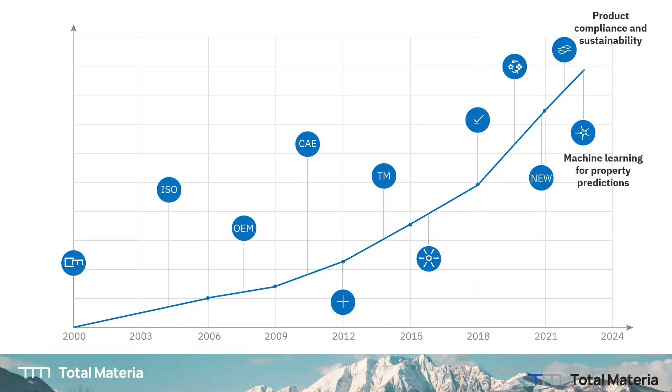In early 2000, we started serving the engineering community. We have 30 subject experts, support specialists, IT and software engineers continuously updating and upgrading Total Materia content. A lot of new products, a lot of new solutions for you to solve your challenges. Headquarters in Zurich, Switzerland, and our development office in Belgrade, Serbia, so close to Romania, in Eastern Europe. From Belgrade we are reaching more than 100 countries.

And as you just saw, so many industry leaders and companies have been using Total Materia for a long time. Our team is at the heart of the company; our dedicated team is the driving force behind delivering knowledge, and they're all hard workers. I'm glad that I'm working with this genius team here.

Our areas of competence: reliable digitized data. Reliability is very important because you can reach so much information through the internet, but you're not sure if it's reliable, if it's okay to use, if it is correct and accurate material information. The more accurate information you reach, the better your estimations, your simulation results, and your products get.

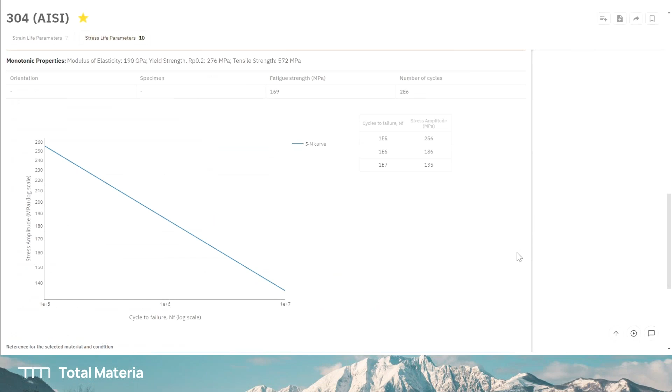When you type a material, it will give you suggestions with a lot of different standards. We have thousands of mechanical properties of one and only material. It depends on the form of the material, the thickness of the material, the heat treatments of the material. You can see the joints information, you can see strain curves, SN curves. Within one click, you can export this material card into your solver.

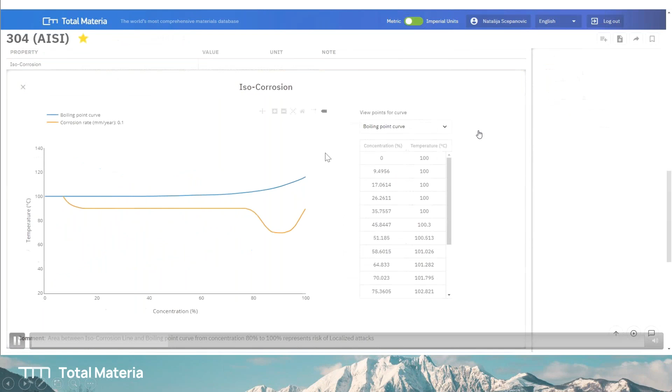You see thousands, tens of thousands of corrosion tests here for this specific individual material. You see the detailed view. It gives you elevated temperature, different mechanical properties and physical properties, of course, according to different standards, different heat treatment, different form of the material, different dimensions, and it's all detailed information in one particular material. We are talking about thousands of mechanical properties for the same material,

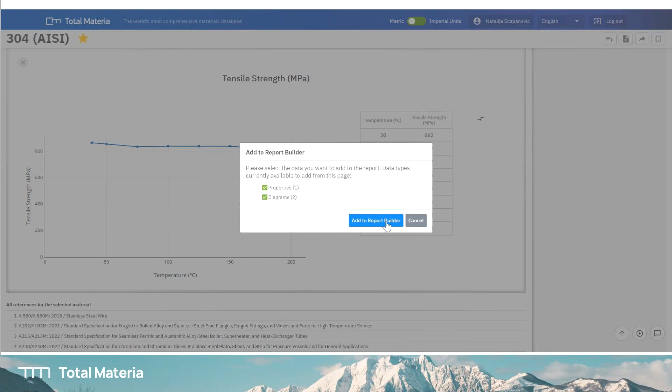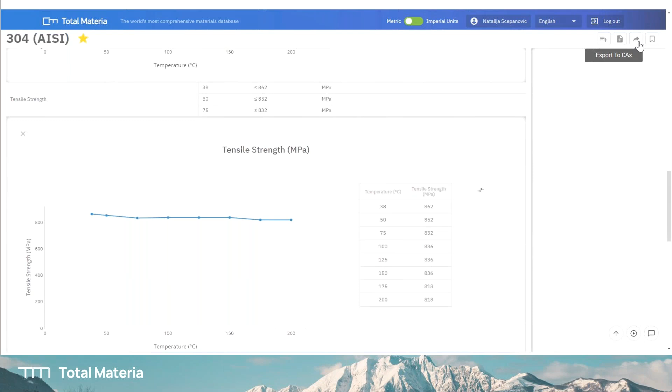because, as you know, let's imagine a sheet metal. At 2 millimeter it gives you different mechanical properties than the 10 millimeter one, right? So it's very easy to understand how rich the material information and content is here, and how you will make more precise decisions. You'll see ANSYS, Abaqus, CATIA, SolidWorks, Siemens NX, anything you want to choose. It talks to your solver, and here we go.

Your material card is ready to go for ANSYS to import, because when you export this data, it's going to go as an ANSYS XML that ANSYS can read. If you export with CATIA, you will see a different format. Then your CATIA can read this material card.

So you see the equivalence of the material. When you filter the same material in American standards and you want to see the Chinese GB standards equivalence, you will have a list of materials. You can click here, I will show you again live, to compare these materials by one click. And you can also save it as a PDF.

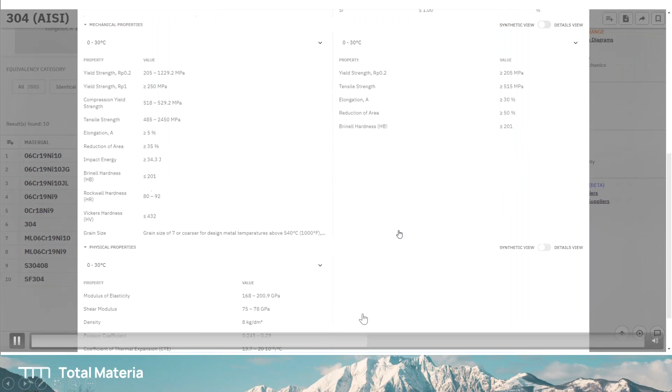You can compare side by side. You can save this comparison and send this PDF to your decision maker to say, okay, you want me to produce this material with the American standard, but I found it in GB standards. It works for me. What about you? Here is the comparison of the material cards, let me know if I can produce this product with this material. So you can get this confirmation real quick, easily, with a reliable source.

Advanced search: when you don't have any material decision already, you will search, filter some material group if you want, or select by mechanical and physical properties, like yield strength minimum value, tensile strength minimum value, impact strength minimum value of the material. So you have something in your mind, you have the project, you have the product, you need some really strong material information. To choose a material by its mechanical or physical resistance, you will use advanced search.

With this click, as you can see, you can compare these materials side by side. You will see which one has the highest tensile strength, which one has the highest yield strength. You can compare up to 100 materials side by side. You can still export or download as a PDF, and you can compare materials in this way.

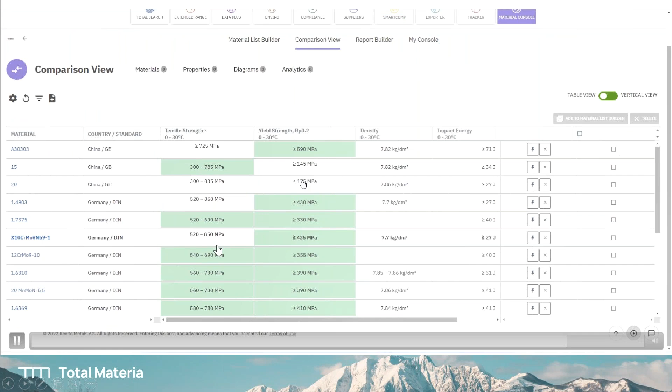And you can compare with an analytics chart and radar chart. 3 or up to 5 different properties you can find. You'll see an analytics with tensile strength and yield strength values. You can check if these materials are compliant according to different regulations, up to 5 different regulations you can put there, and you will be sure that this material is compliant.

Total Materia, I just received a question, sorry about that. Total Materia is updated every single month, for 24 years. Every single month we are adding new materials and also new material information. And greener alternatives, Green Pro certified. This is all information about materials that you would like to ask about in detail. I would love to answer.

Does this material discovery option cover only principal suppliers? The material discovery option covers every single material that we have inside Total Materia. Not only producers' materials, also the national and international standards materials.

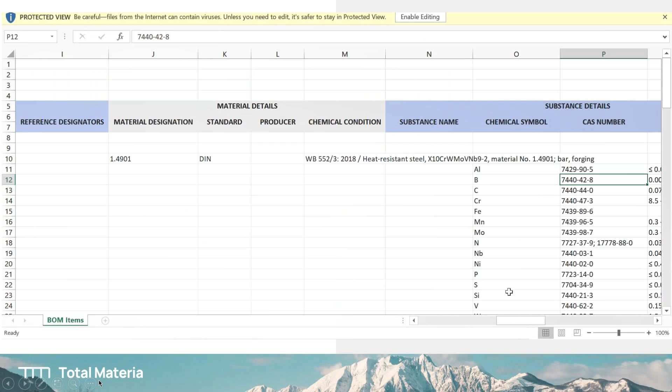You need to know this information. So you are exporting this data. What about the BOM export template? What it says: not compliant because this substance is not listed on RoHS, or substance is not listed. So here's what we find out: 1.4901 is not compliant under California Proposition 65. So what we're gonna do, either we will find an equivalent compliant with all these three regulations, or we will just find another one that is suitable for California Proposition 65. So this is that easy to use actually.

And here we have material list. We are adding new material list like BOM assessment, what materials we are using for our products. So what is our life cycle assessment? It's coming up carbon footprint and detailed information more than this. And you will just choose ecosystem health, climate change, or any other methods. And you can find how it's harming human health or natural resources, like energy demand is very important, critical. You're choosing all these different indicators. So we chose climate change and energy demand and make a calculation.

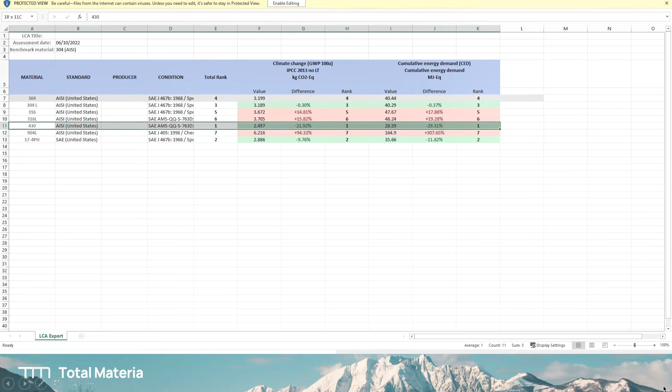We are just spinning up one of these materials. According to these materials, some of the materials that we're using are not that green. You see, we have some greener material here that needs less energy demand or causes less climate change results. So these are the trouble materials that if we change these materials out of our production, we will start producing greener products. We will lower our carbon footprint, right? So all these details, it's very, very easy to use and very, very easy to reach.

And here's our AI tool, Predictor. Predictor will help you a lot. If you're just upgrading or trying to work on new material development, you will have different options to make chemical composition changes to give you a prediction how it affects the mechanical or physical properties, or you have a material, you don't have material information inside the material or anywhere. So with one click, you're testing this material. It will give you temperature dependent predictions. So mechanical property predictions, physical property predictions in different temperature rates. Quick and easy to calculate, easy to use these calculations.

Tailored chemical composition. I mean, you can see chemical composition changes of the material, how it affects the mechanical or physical properties of the material. So accurate predictions, it will make you save a lot of money, a lot of time. Then you are still using these material properties that you generated as AI test results, export into your solver.

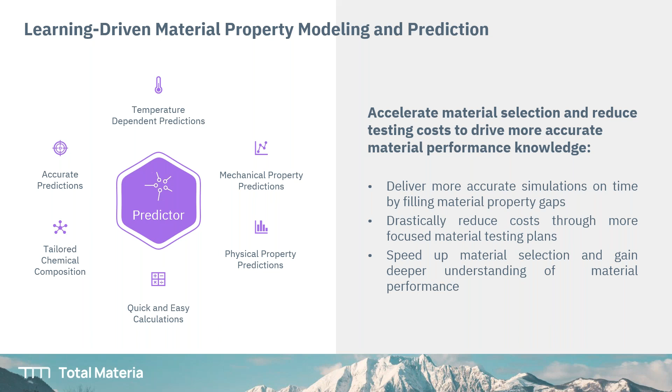So here, how it works: since 2007 with Smart Comp, we can predict material name and we will give you accurate material name according to chemical composition, which Hitachi and Thermo Scientific spectrometer producers are using this tool to give you good material information. And here you can see we have a material here, we have a chemical composition and only two mechanical properties, and there's no physical property data for this material we want to use and export to our solver. There's nothing we can do unless we purchase this material, send for testing, and generate some results, physical properties.

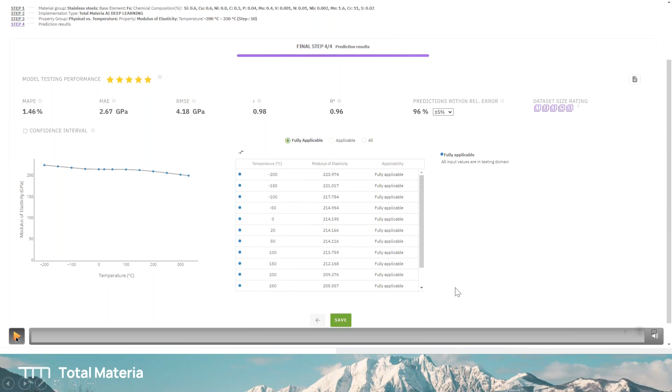Let's say we're looking for modulus of elasticity of this material, but in different temperature range, minus 200 to maximum 330 degrees. And in a second, we have a result. How is Predictor this successful? You think, we have 700,000 reference points. We have so many similar materials, similar to this chemical composition, similar to these mechanical properties. Then Predictor is giving you these calculations in seconds. As you can see, very high testing model performance and very highly accurate results that we can provide. Just that easy. So this is one use case scenario, how you can use Predictor.

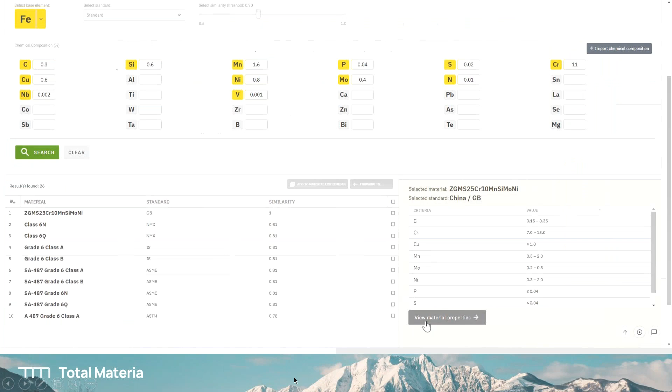And then here's another one. This is one of the engineers. Andy is asking Natalia, can you help me find yield strength values of material 7075 AA? This material is very, very popular, especially in aerospace. But we need T8, T8 heat treated material information. We need yield strength values. Okay, 7075 is available in Total Materia.

Easy to find. As you can see, click. Here is 7075 AA. Hold on, we have 1079 mechanical properties of this material, including price information, including where to get, including corrosion, aging, tribology, joints, how to weld, creep data, fracture mechanics, fatigue, formability, 131 stress strain diagrams, machinability, 35 different metallographic information, 8 different heat treatment information, including a lot of heat treated materials, details of this material.

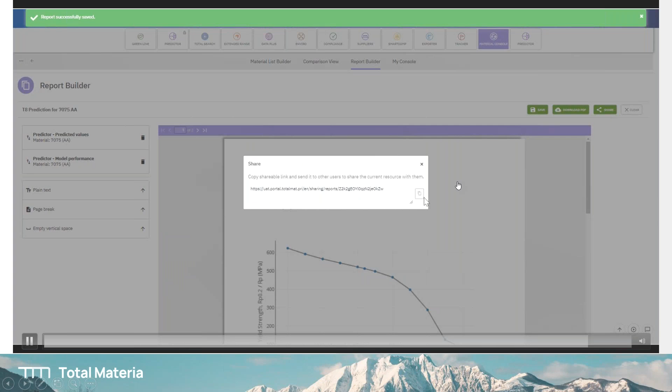When Natalia sends this link to Andy, Andy will click this link. Even if Natalia is in Belgrade, Andy is in California, he will reach this report or this material information with one click. So this is how Total Materia helps in general.

These are some of our use case scenarios that I will try to explain. And there are a lot of different use cases. Delivering the most important part is reliable approved materials information to your simulation support. The simulation softwares, which is FEV from Germany. It's a huge engineering company using.

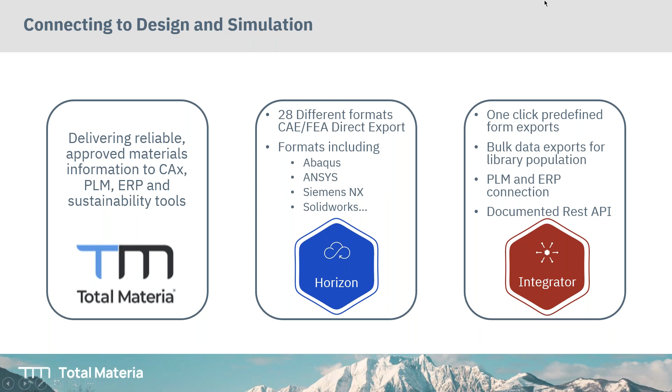A lot of our users are using material cards only for their simulations sometimes, and so many companies using with different departments. We will talk to your PLM, ERP system, sustainability tools. We support 28 different formats for your simulations, including Abaqus, ANSYS, Siemens NX, SolidWorks, anything you use, and you create your own internal material solution.

So this is what's coming up. We will have a new internet site very soon. Hybrid enterprise solutions. We will have some new developments coming up, including zero carbon and CO2, carbon dioxide, carbon footprint edition, and here's how Total Materia is helping you.

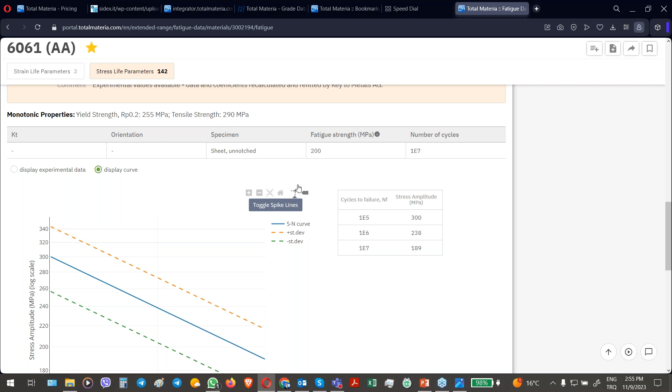And my friend can see this material's fatigue data, because we have stress life parameters 142, strain life parameters 2. So I don't want him to get lost in all this fatigue data information. All right, I choose one of those already here. Okay, and I cannot even find it again. Maybe it takes time, so I'm saving this and sending it to him for him to see this SN curve. These are experimental curves, and these are the cycles and stress values. So I want him to use this.

Okay, and he wants to export this to his solver. He will use Abaqus. It's ready to go: import to Abaqus as a material card. If he's using ANSYS, all properties he can choose, next step, next, choose the precise material information. This is very important. I choose it, and you see we still have 30 conditions, but I want this sheet metal. I can type here sheet metal form only. You see I have 7 options right now, and it gives me different heat treatments or different dimensions of the material. This is what I'm talking about.

When you export this material card into your solver, your simulation software is highly advanced, so give it precise information. You're using most of your time optimizing that design, right? You need to choose the best possible design. You're optimizing it, but it all depends on the material properties. If you're choosing the wrong material information, it will give you wrong results, right? So why are you doing these simulations? To get precise estimations before producing a product or a prototype. So if you give your simulation precise information, it will give you better simulation results.